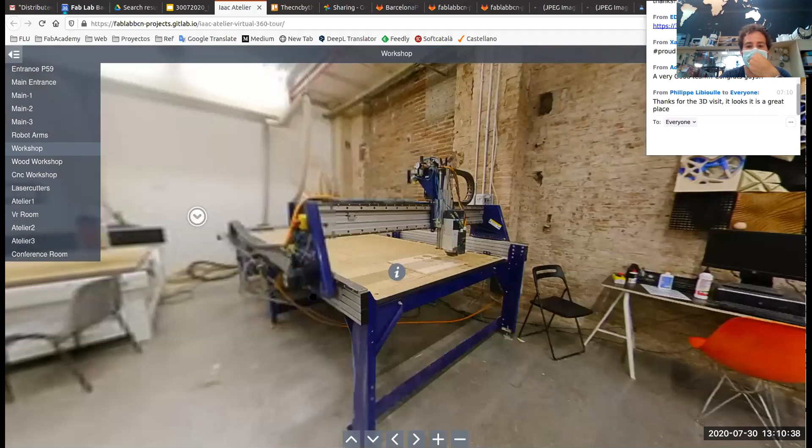Also the multi-networking project: each student could publish data from sensors they have at home through the computer or an ESP board, a Wi-Fi enabled board. So they could share, and across the whole class, they could share all the sensors and activate other people's outputs. For example, let's say Gustavo has a humidity sensor in Brazil, and Adrian is moving a servo based on Gustavo's data. That was the multi-networking idea.

And also to make it a little bit funnier, more like a YouTube channel, we made Making Hyperconnected, where we did a live session on how to do molding and casting with homeware stuff, mostly cooking supplies, since silicone is easy to get normally, but when everything is closed, the only things you have are like cookies, oil, and that kind of thing.

So we found out and tried to make recipes, like non-technology to make technology, to give people the same experience with different materials.

This reflection was very important for us, to understand that we can teach and engage the community around the program with the materials they have at home.

This is why we did this hyper-connected making from home, based on, for example, things you can have in the kitchen, and you can create molding and casting. Of course, you have to skip some digital fabrication parts, but you can at least understand the basic concepts of some of the digital fabrication processes.

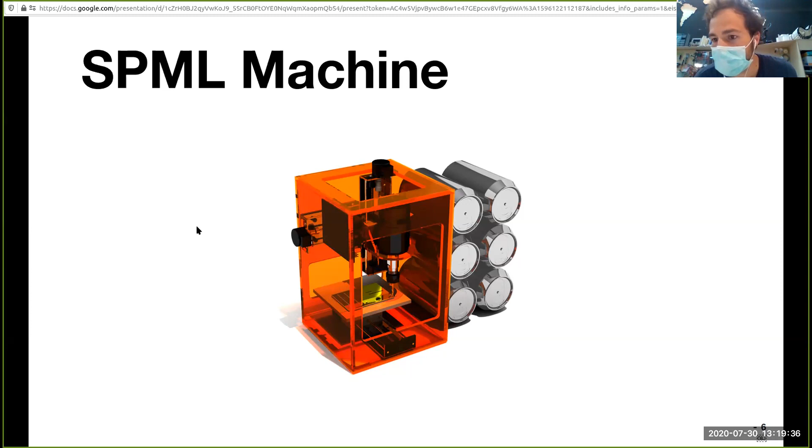So the idea was, as you know, we tell you all of the strategies that we try to follow with the materials that the students had at home and were more available. But there are some digital fabrication processes that are hard to test and learn if you don't have a machine. So the idea was to develop a simple machine, a learning machine more than a fabricating machine, and we have to be clear in that. So the idea is, well, it's a 3-axis machine that can be basically designed for any purpose.

And maybe Edu can explain how this idea came up. So the idea is not actually to challenge big manufacturers, because everybody knows you have really expensive machines, medium cost machines, and cheap low cost machines that are now really affordable and are actually moving this digital fabrication world.

The other point was to try to develop a kind of toolkit for the students that was easy to hack, easy to build, and especially easy to understand all the process involved in building a machine. So actually, we were really confined, and we had what we had stored at home before the confinement. I'm like an old guy, and I store a lot of motors and these kinds of things. I have DVD writers that have really small motors and these kinds of things. Actually, this is one small version that I developed at home just for fun.

It's a cookie engraver. And I said, okay, this is actually an Arduino, a basic thing with a few motors and a simple concept of mechatronics. And actually, how we can distribute this in a way that the students learn and can actually do all the process and modify it themselves.

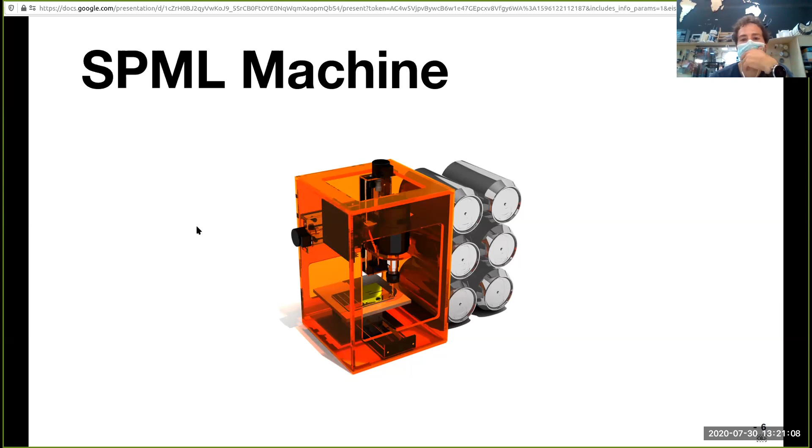Actually, right now we have one student just in front of us who has hacked the machine and interpreted it in his own way to make a different machine. Yeah, we can see him working with a lot of cables.

So we came up with the idea: let's try to make an accessible machine, easy to build, as low cost as possible. Low cost was a big concern because as an institution, we cannot pay like €1,000 for a machine for each student. So keeping the cost accessible was a big deal.

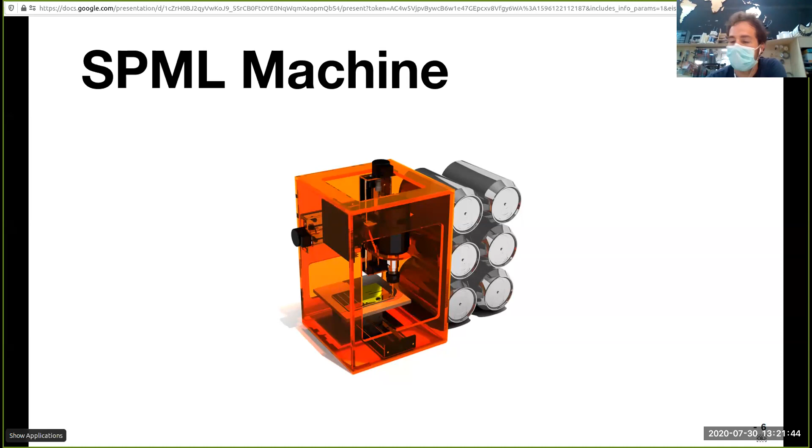And going after the market, looking up retailers, and simplifying the design to the minimum amount of elements, we arrived at this project. Finally, just about 1 week ago, we finally got all the components because of the delays from the confinement. We have tried hacking different motors and everything.

And for this machine, we have fabricated the PCBs here in the lab with another milling machine. We ordered because we need to actually produce like 30 or 40 boards for each student, who will solder at home, simplifying the components also on the PCBs. So they understand all the process.

And we developed, or tried to develop, 2 different versions up to now. There's the 3D printed one, for what happens when you only have access to a 3D printer, a standard size one, like 200x200x200. So actually we figured out, okay, let's say you order the components like the motors, but you cannot fabricate the frame — you can go with a full 3D printed version, simplified enough.

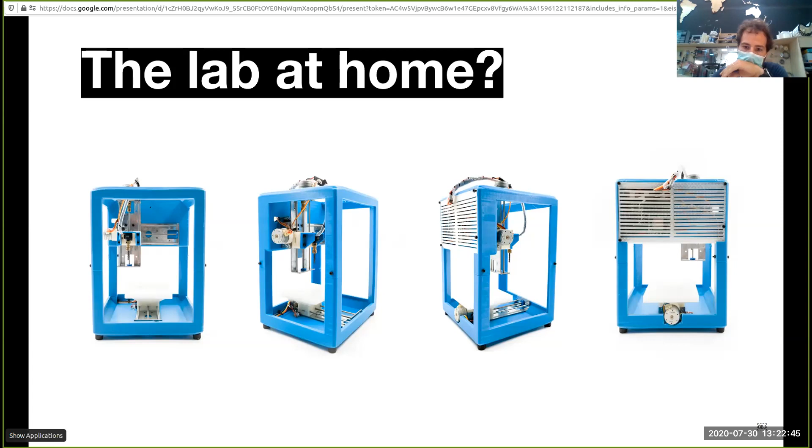And the previous one was the orange one, the laser cut version, where all the components are laser cut. Our idea in the future may be to develop a CNC one, but that's not that feasible for a student and implies more knowledge. So we will try to keep it to laser cut and 3D print for the moment.

So the idea for this machine was to develop a multi-tool machine. That's why we also developed our own custom board that is Wi-Fi compatible. That means you can, at a point, control it also remotely from your own home.

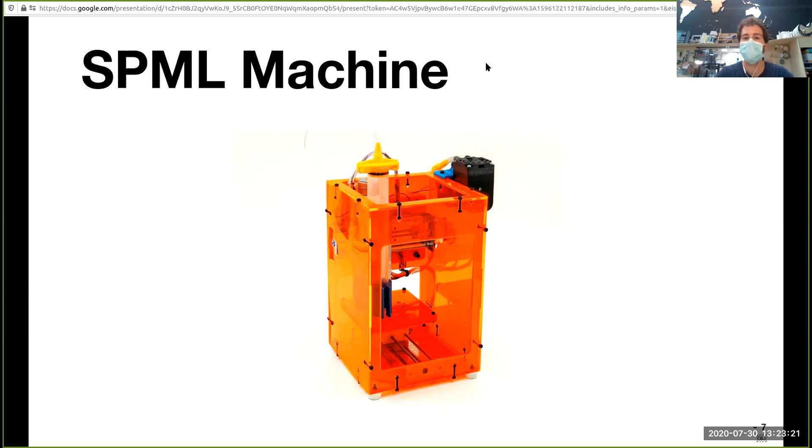Do you want to go to the repository? Do you want to explain the different aspects? Okay, let's go to the repository. We can explain a little bit the idea of the Barduino.

I think it's a very nice concept because, well, for those of you who are a bit familiar with the Fab Lab world, Arduino as it is was not our invention. The first version of, let's say, a Fab Lab version of Arduino was developed here by Luciano, when I was doing Fab Academy.

What we did this year was basically redesign and use a better processor with Bluetooth and Wi-Fi, and well, everything you can imagine now. We upgraded the Barduino to the new times and new microcontrollers. So the idea was, can we have an Arduino version, or a board, that allows us or the students to learn almost everything related to electronics and fabbable, let's say. So this is why we gave that one.

And together with that, there's the Barduino CNC Shield. So basically the Barduino was presented as a fabbable alternative of Arduino and compatible boards. Our main point of developing this was to have Wi-Fi and Bluetooth compatibility, so the students were able to connect to each other through the internet. This helped a lot in development of the tools, and the multi-networking assignment was done all with the Barduinos each student had fabricated at the start of the academy. Diane is showing one right now.

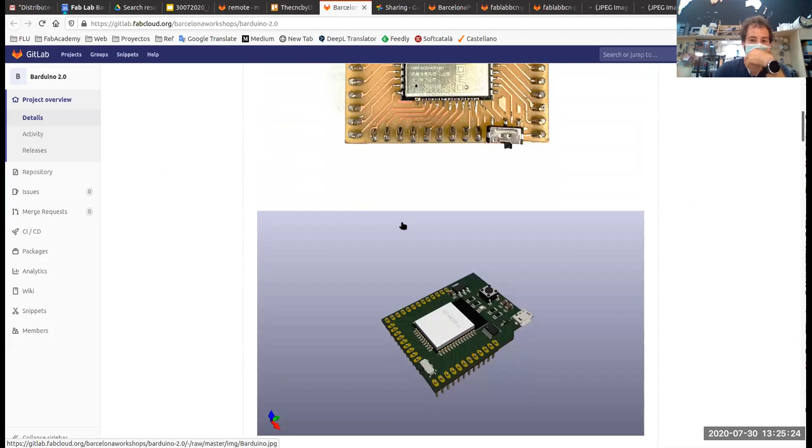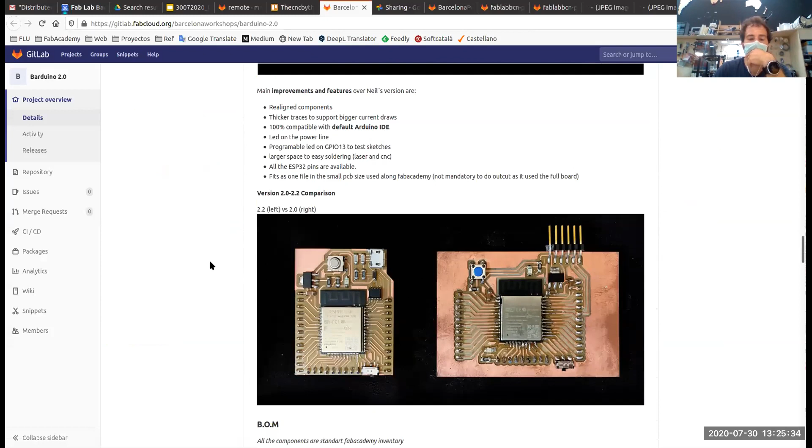So the Barduino CNC Shield is, let's say, a vitamin for the Barduino, allowing it to control external motors, hardware, sensors, etc. We went through different steps of the Barduino, trying to simplify the design as much as possible. So the latest one is breadboard compatible; the initial ones were not. We tried to simplify and still use the least amount of components to make it usable, and we have the pinouts and how to use it, etc.

So the documentation is still ongoing, so maybe you find something. In that case, you can make a pull request and fix it.

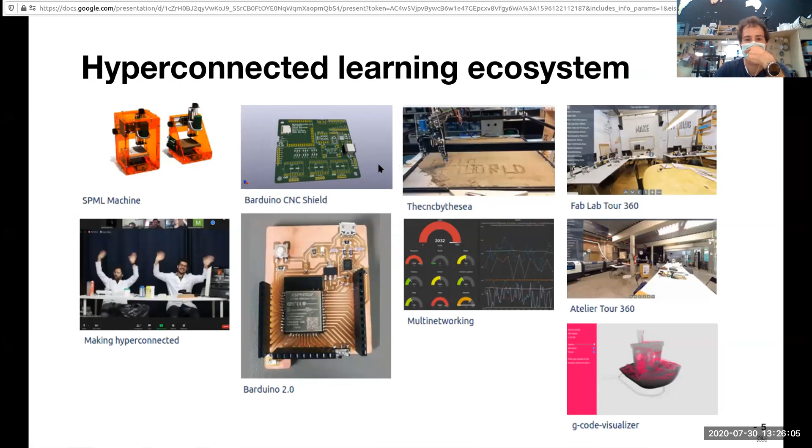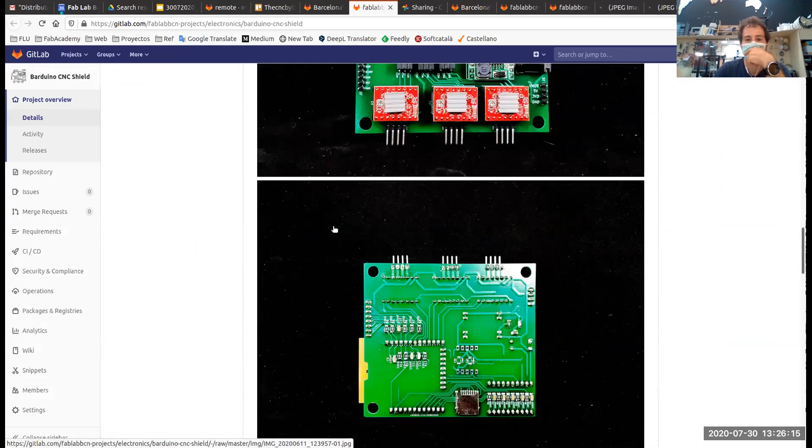So the CNC Shield is basically our own version of ramps, like the controller of a 3D printer or a laser cutter, that is quite compatible. We call it CNC Shield because it was the main purpose for us in this case, and it's the main brain of the SPML machine. So it's a daisy chain of things, where the Barduino CNC Shield we used for the multi-networking, we found out, okay, we can even use it for a machine. So SPML, and also the Kraken, which is the CNC by the sea.

Yeah, let me go. So, yep. Do you want me to run? Okay, let's run the video.

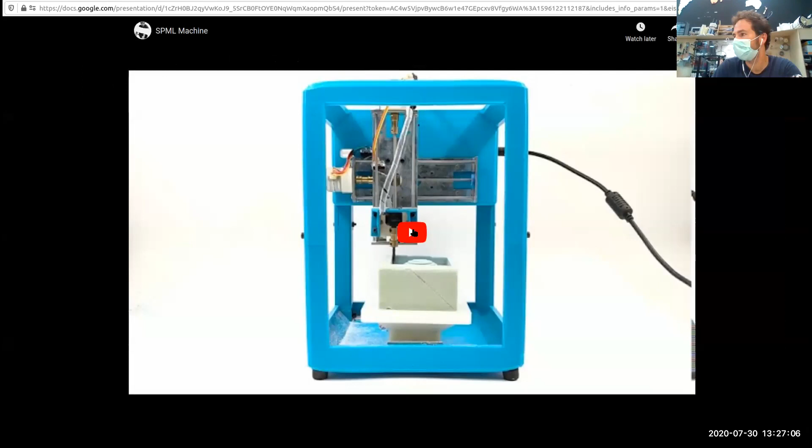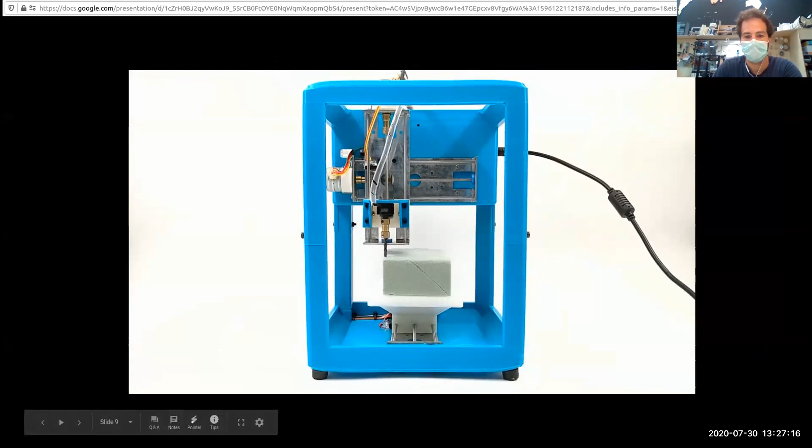So up to now, this is actually from 3 days ago. We finally ran it with a small mini motor and a piece of foam. It's not a professional machine, it's not for high accuracy at all, but it's enough for learning how to actually build your own machines, and to make you conscious that machines could be made by everybody included, you can design your own tools.

Armand, who is here, is trying to design a 5-axis machine, the same way we tried to design this machine. Just next to me, I have the orange one that just finished today. That's actually a bioplastic printer with a syringe and a small air pump to make it portable. Maybe put one together with the other one. Okay, this is too much. Oh, your babies.

So different versions, different styles. And the idea is, we measured today and we think we can run it on batteries to make it even more portable.

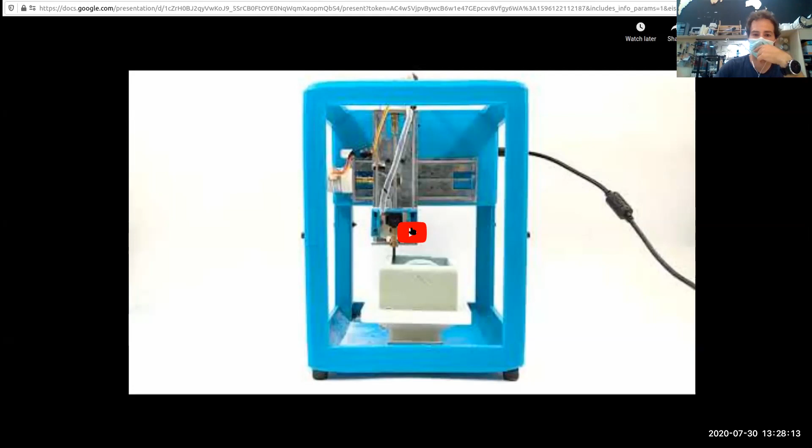Okay, so here you will find the repos and basically all the web pages I was opening while Edu was talking. And also you'll find photos and videos about the process, and us going crazy with any small step we were doing with the machine. So feel free to contribute in the repo, also take pictures of your process, the building one, or replicate it, or bring it to the next level. So please talk to us.

And then the other tool we did, the one we wanted to challenge you to do today, is the CNC by the sea. So we put a nice phrase here: how can we bring the beach into the lab. But the idea was, again, for the CNC, we couldn't have access to a real CNC, let's say.

So we decided how to explain the concepts of CNC without actually going to the lab. And we found out that we have a problem. Okay, yes, we can control a machine remotely, and with this package we're showing you today, you can control 3D printers, CAD, and CNCs. But you should not control a CNC or a laser cutter without anyone supervising it.

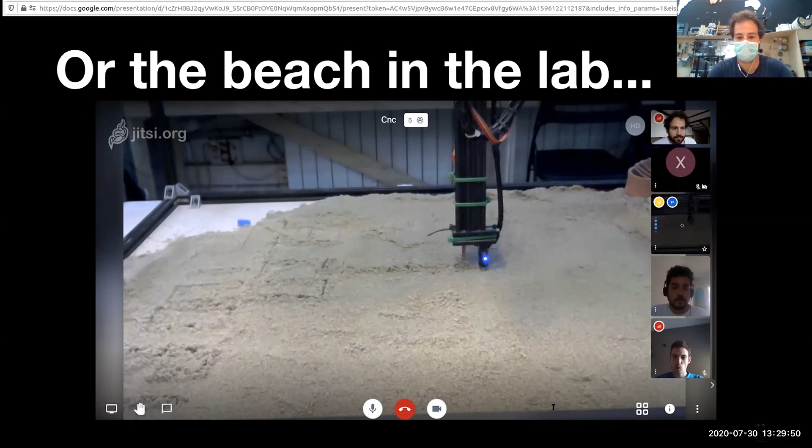So we said, okay, we are in Barcelona, the beach, everybody's missing from home. Okay, let's put sand on top of the machine. And that's where CNC by the sea comes from, because it's a machine that is for drawing on the sand.

Maybe Oscar can explain a little bit more in terms of the group project that we envisioned. Sorry, are we going fast? Okay, we can go in there. So if someone has any questions about what we're talking about, or wants to go more in detail on anything, just tell us. I think while people are trying to operate the machine, we can talk on top, let's say. We wanted to talk less and do more.

But well, anyway, apart from having this experience of generating the code and sending it to the machine, it was also about how we can do something together. Can we create drawings based on incorporating, adding drawings on top of each other? So it was part of the narrative of the exercise.

It was not just lines. It was like, I draw something and then maybe another student can add to this drawing, and we can create a final art piece, if we're talking about sand, with the collaboration of everybody. So we're always trying to incorporate these values of working all together to create more value to the experience. And we put here the links to the repo.

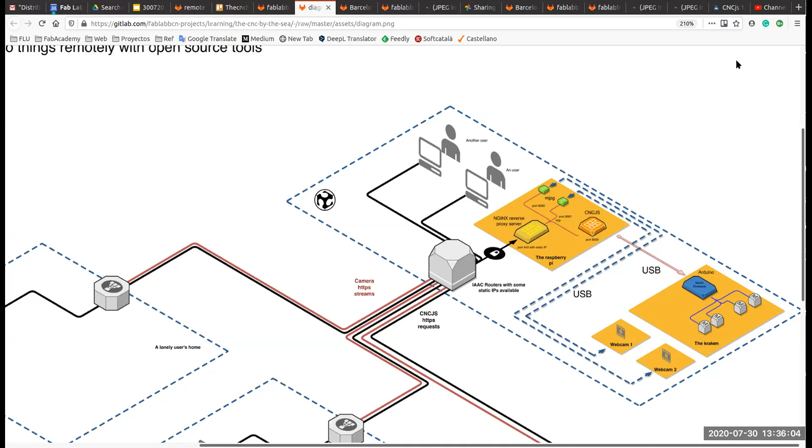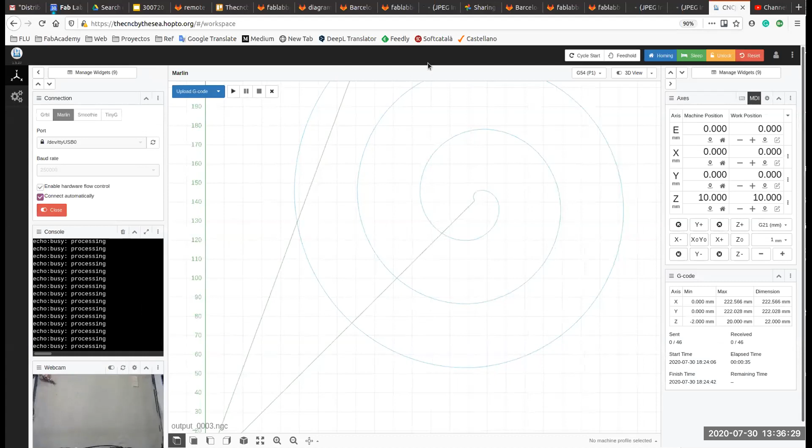Then the students, if you go to the interface, if you want Edu, what they see is something like this. Basically it offers an interface to control the machine as we are used to. You can upload gcode, open and close the serial port, and even see the webcam feed on the left-hand side. This interface is highly configurable with a simple JSON file format, which is also available for this machine to simply import and load so that everything works from the get-go.

It also supports multiple users, but of course only one user can send something at the same time to the machine, because the machine cannot interpret various G-code files at the same time.

As you can see here on the different streams that Edu is putting out, you have a top stream where you can see what you're drawing, and a side stream where you can see the depth of the tool and check if you're actually touching the sand or if there's any problem, or just enjoy watching it in the background.

I don't want to stand here much longer. If you have any questions or think anything can be improved, we welcome you to post issues or comments in the repository or here in the chat, and even interrupt us while we're talking. I'll let Edu explain a little more about the machine itself or interact with it.

Maybe Edu, you can go a little deeper with the electronics that move everything. Okay, so actually the machine, unluckily, was not documented. The only thing that is documented is what we did in our spare time, but it's not a special machine at all.

That's also one of the main reasons not to document it, because it's based on the OpenBuilds system, which is like V-slot aluminum profiles, and we try to use the most standard things on the market. For example, we use this Arduino Mega with a RAMPS board, which is a really standard board for 3D printers. We basically enabled everything in the firmware, just in case.

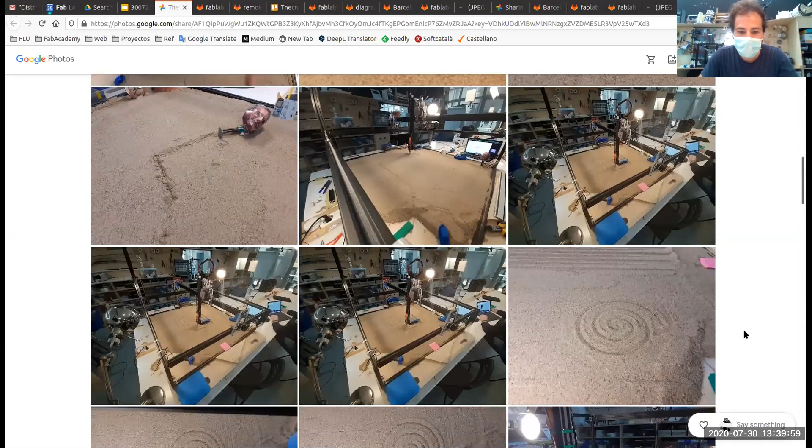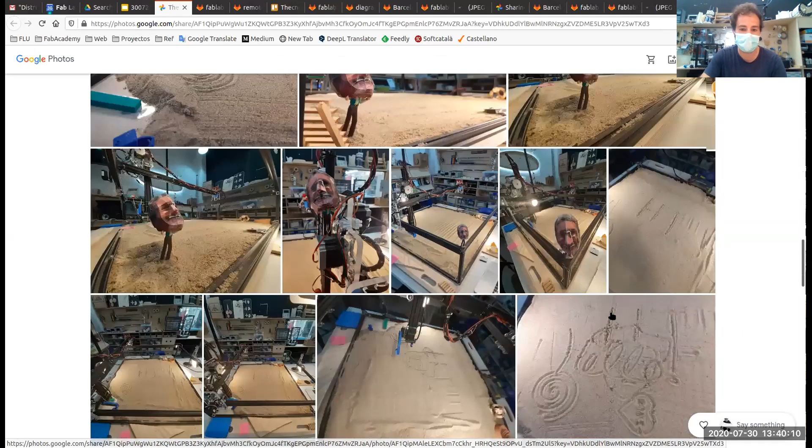So these are images we captured during the process. We were logging into the cameras and taking screenshots, and you can see some of the students' drawings, some of them a little clearer than others.

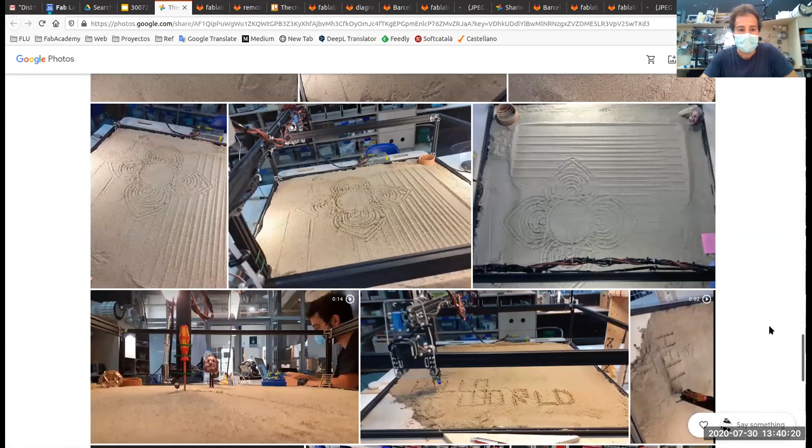Some were more classic, like a 'Hello World'. There were some that were, I don't know, sending us messages.

The students found the process so interesting that even their roommates, who weren't students, started sending drawings and playing with the machine. So we created a nice interaction ecosystem between students, non-students who liked participating in the project, and us.

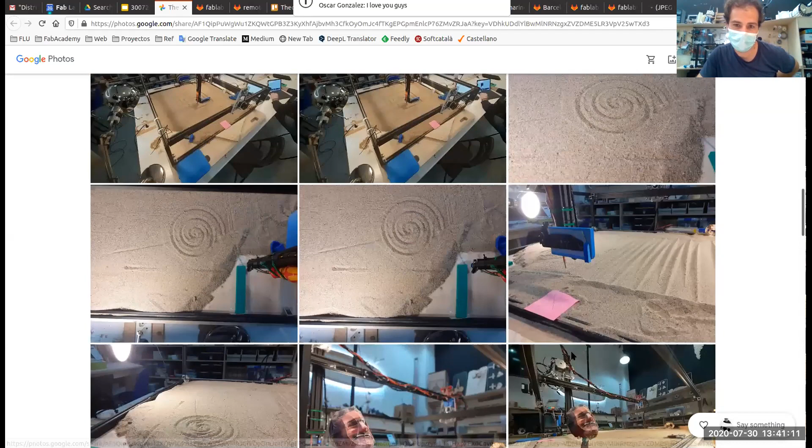Some students left their drawings because we have a system to erase them - we move a servo and put a piece of foam to flatten the surface. Actually, some students didn't want to clean the drawing, so they drew on top of it, designing over other people's drawings. That was quite interesting.

Okay, so I don't know what I'm sharing right now, I'm a little bit lost. Let's jump onto the machine.

I'll share with you the links of the webcam. We have two video streamings - the Pi manages two video streams quite comfortably with just a little fan so it doesn't overheat. We have one view from the top and one view from the side.

The side view is important because it's where you set the zero on the side of the machine, and to draw accurately you need to know the depth you're taking on the drawing. As you can see, it's not technological at all - it's just a flat screwdriver attached with some zip ties.

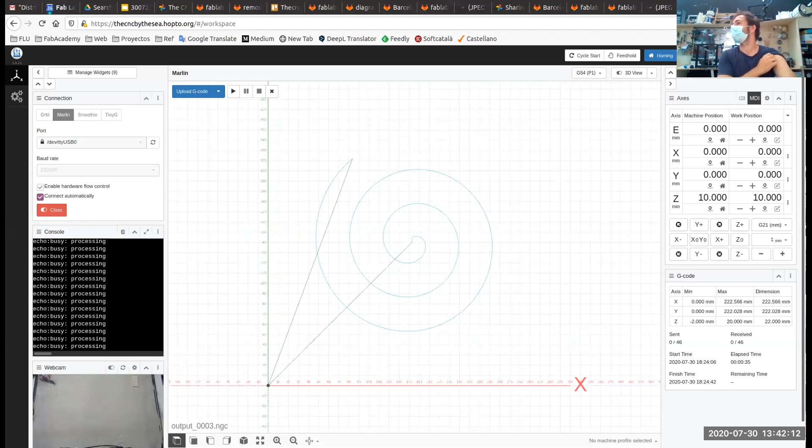Maybe I can show the camera more closely. It's actually in the second link, the 8081 stream - the servo with a piece of foam attached with tape, zip ties, and a screwdriver. High technology digital fabrication, exactly.

Here I'm sharing with you the interface that you can all access. Oh sorry, Oscar sent you the good links with the proper naming.

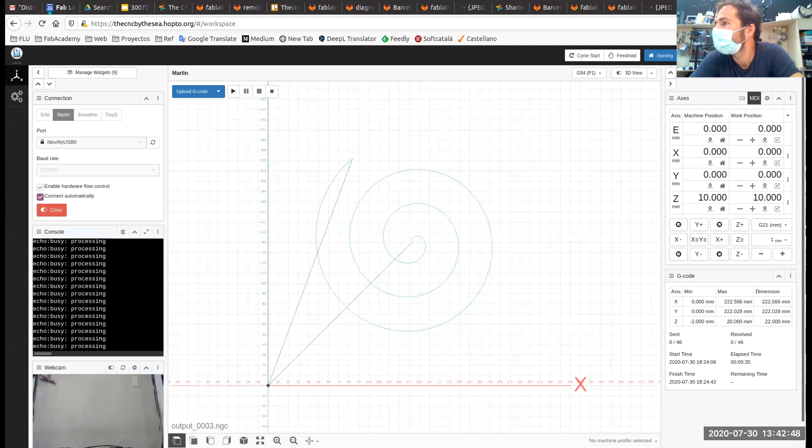So when you try to log in, you will see. Do you want to share your screen? No, share yours, I'll go to your computer.

You'll see it's a top view, but you can also have a three-dimensional view of the workspace, because this CNCjs is designed for milling - not only for remote control but also local control. We just repurposed it for our needs.

We have the connections, like connect to the machine - in this case the Pi is connected to USB 0. You have the console showing what's happening on the machine, so you get live feedback not only via the cameras but also on what's happening in the code.

And the standard menu for controlling machines manually. Basically, you have to upload G-code.

As an interface, we like it a lot because it's not overwhelming. It shows you a lot of things, but it's not too much for the students. Often, someone new to this kind of technology gets in front of a super complex interface like Mach3 or Mach4 and just freezes, afraid to touch anything because everything might explode. So the colors and the kind of interface were things we considered carefully.

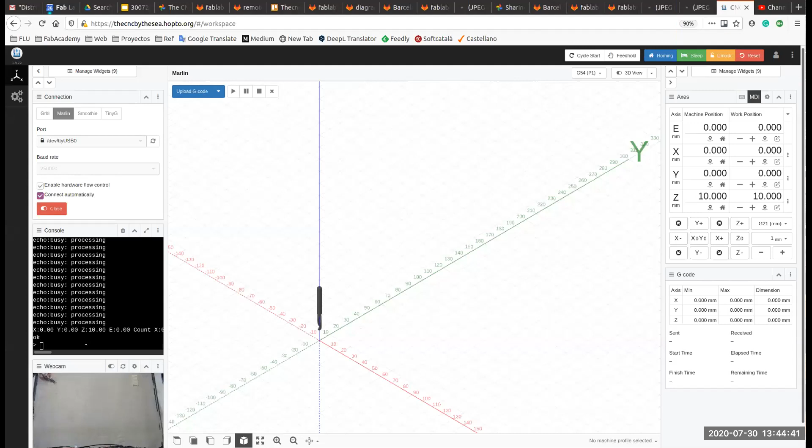They probably also need to know how to load the JSON for the configuration, and the password - I think you saw it, but maybe we can put it in the chat. The password is here in the documentation. Okay, I'll put it in the chat too.

Okay, yeah, we have user and password, so not too many random people from the world can log in easily. So take this amazing opportunity to have the password and connect and play with the machine. Now it's on YouTube today, so be careful what you say.

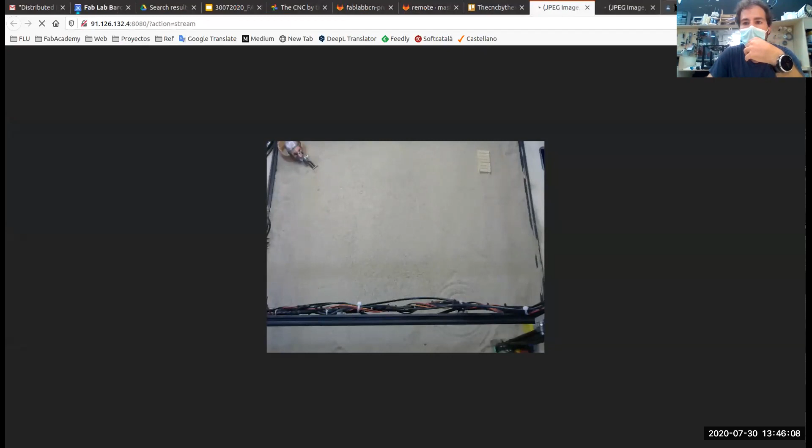Sorry, I'm closing tabs. Giuseppe will send... actually, Giuseppe didn't say anything. Giuseppe is the guy with this cover, you know, it's also one of the guys that are behind this. Actually the blue comes from his hair. Exactly.

You send? Yeah, so the file that you have right now in the chat, you go to settings, workspace. So you import the JSON file that Santi has already uploaded, and that will change how the interface looks for you.

Let me do what I will do. Okay, restore the defaults and just upload a new one. So I need to find the chat, download the file and put it here while they're doing it. Is the... okay, there's too many things. Okay, it was that one.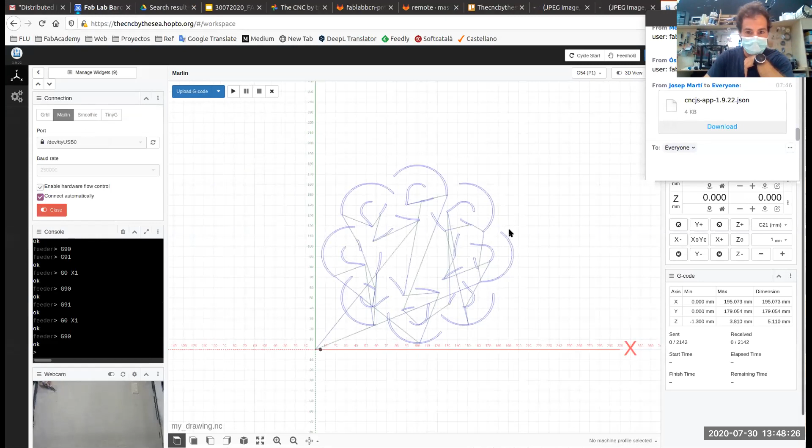So for the ones that don't feel that comfortable, you have to go to port, select dev TTY USB 0, and the baud rate is 250,000, and connect. In that moment, you will have the interface connected.

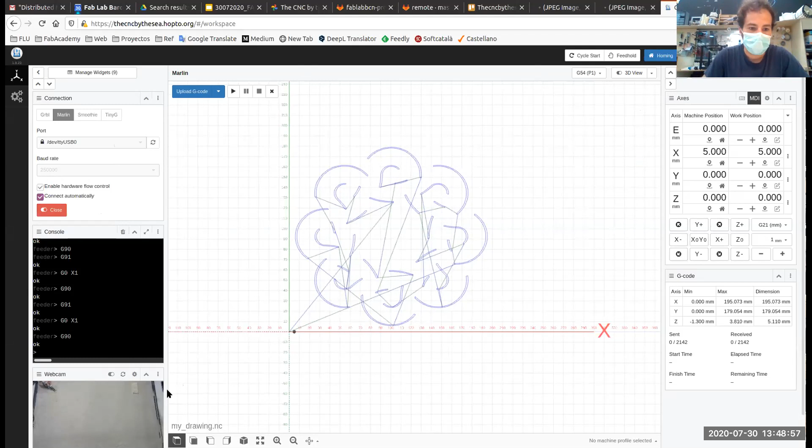Before anybody launches the file, we always recommend to move the Z up so you don't crash on the sand, and do a G28. What I will do is put the other screen here. Yeah, put both screens.

Okay, so now I think we can see everything. You will know that you have access because basically the X and Y buttons to move the machine, you can touch it. So if we move... well, it's going 1 millimeter. Let me go a little bit more.

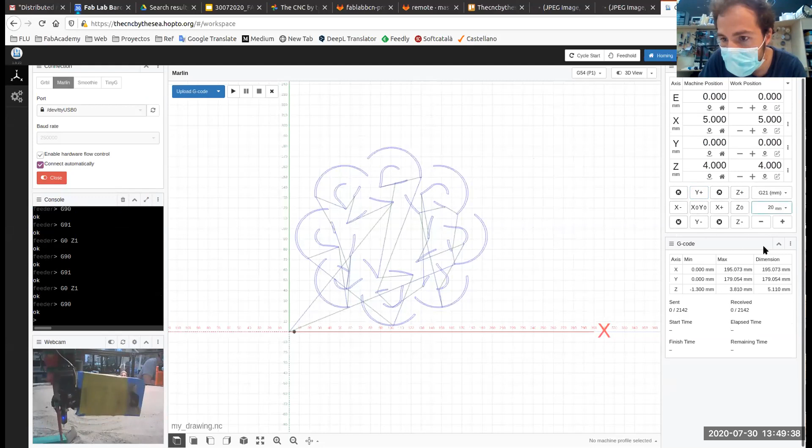Okay, so the Y - it's very difficult to explain this, but the Y, let's say... well, I don't know how to explain which is the Y and the X from your point of view.

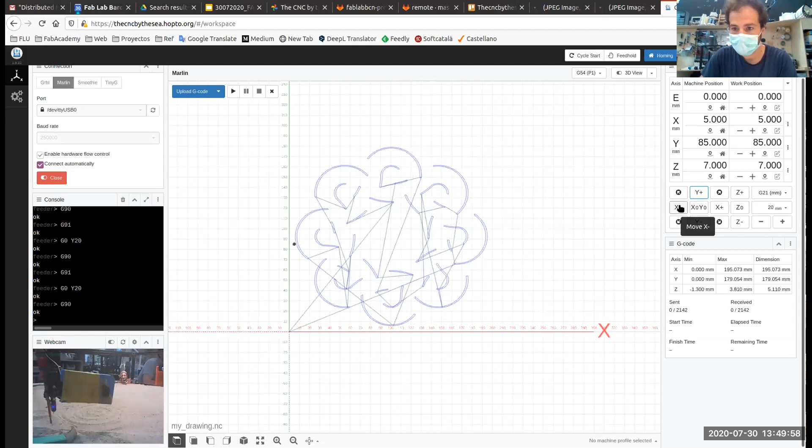But the size, this is something maybe interesting for you: the size of the bed is 700 by 700, but please don't do a drawing of 700 by 700 because we will stay drawing forever. So try to do small drawings.

And then how can you generate the G-code? Here, wherever you feel a little bit more comfortable. I think the fast way, at least for me, is using Inkscape. Inkscape by default, at least the last version, has a tool to generate G-code from a path, and by default you don't have to do anything else.

Then after you generate the G-code, you have to basically change some parameters to adjust the velocity and the Z. It depends on the tool you use for producing the G-code, like a G-code parser. You can also use RhinoCam or Aspire - anything that outputs standard G-code will work.

Also with Inkscape, since it's mainly for 2D drawing, you need to modify it a little bit with a notepad editor like Atom, Sublime, or Brackets, just to be sure that the values are okay.

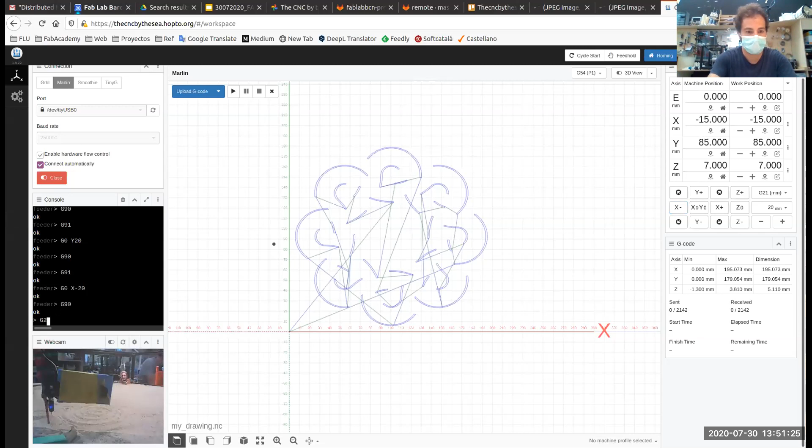So just send a G28, for example. If you go here to the console, you can send commands directly. So if I send G28, you will just go home.

Live, completely, maybe so many people trying to access. Ah, you got kicked out. Yeah, that's weird. Maybe it's YouTube, so many people accessing.

We tested the machine with around 30 students connected live, and when you go inside, you can take control over other people's job. That was funny, we were playing to see who was in control of the machine, and maybe right now we are exceeding the skills and capacity of processing of the Raspberry Pi.

I'm trying to access. Can you access? Is someone able to? Do you have access? If not, let's see. We can. I also got kicked out. Let's see. Bad gateway. Let's see what happened.

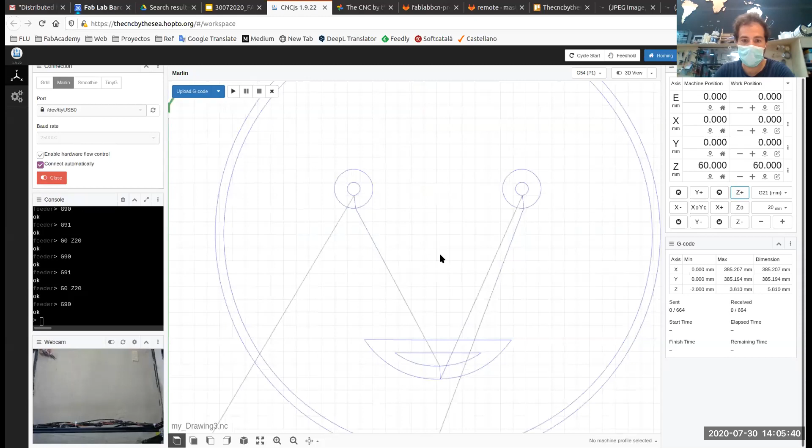In this, oh, I cannot do this thing. So here, actually, whoa, oh, a face. Someone funny. Let's see if someone sent it. No. Oh, someone has done a G28.

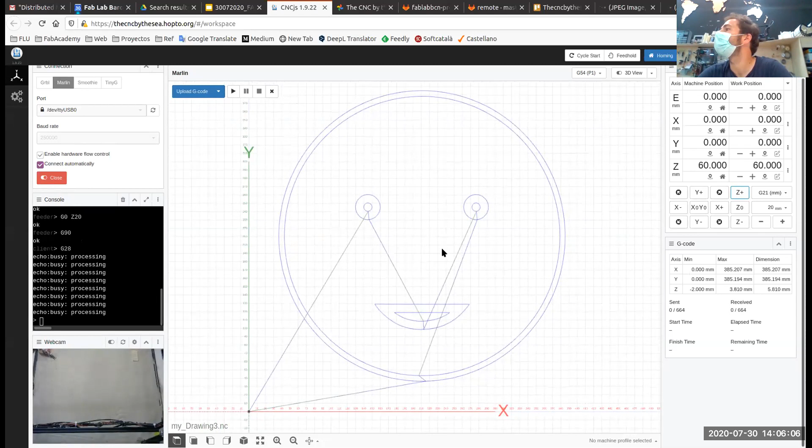It's coming, takes a while. Okay. Did you modify the velocity? No, this is homing, it's going over, it's going to see. Yeah.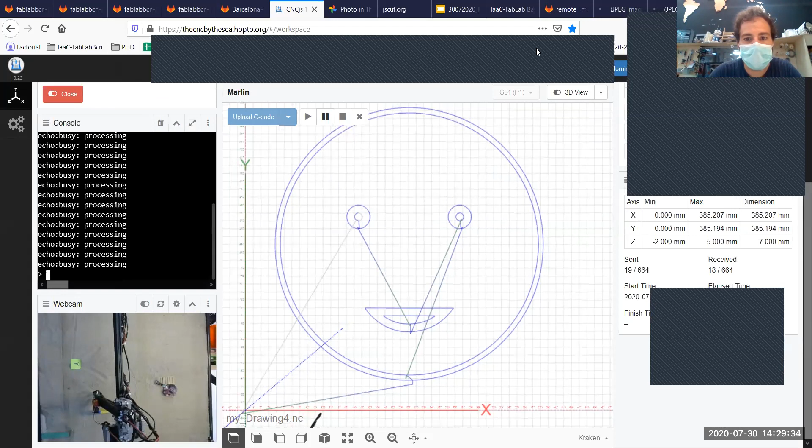Let's go to the other camera. It's not touching the sand. I don't know if it's moving in the air or it's trying to draw, it's like one centimeter or half a centimeter, we can see from the little shadow that shows. Now we are drawing, it's the same drawing.

Yeah, if someone presses like twice. Play. Okay. Is it done, is it done? No, someone connected online.

Okay, Santi wants to share your screen. Oh no, but someone else is drawing. Ooh, dun dun, a heart.

Don't forget to do the 0,0, and I will take out. You need to actually send the G28 command, not G0 X0. Yeah, exactly, because when you connect to the machine, it just resets and forgets where the origin was. As we are using Marlin, a firmware for 3D printers, it doesn't have the variable absolute and relative origins, G54, G55, like other CNCs that remember because they save the home on the EEPROM. The firmware we are using doesn't save it. Actually, it would be nice if we could change that.

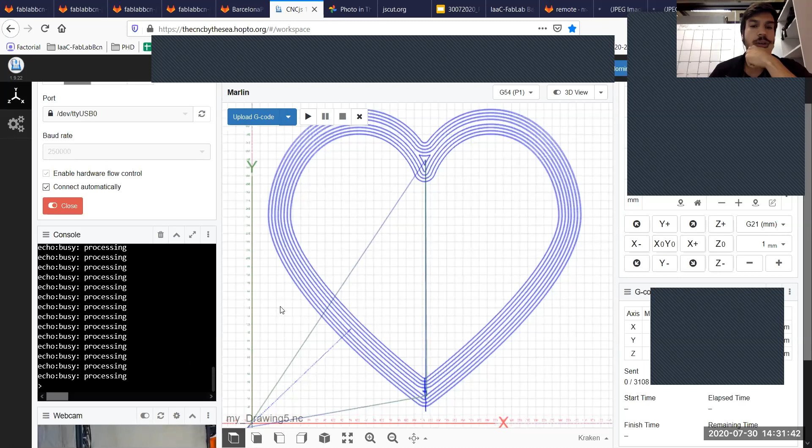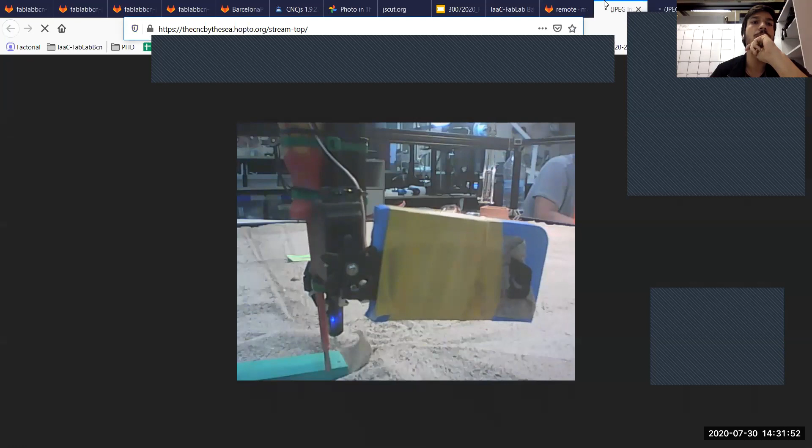Wait, this stream has a little bit of delay, there are so many people. I'm going to close this camera, and you will see it from here, so it's faster.

Cute drawing. Thank you, I'm in love.

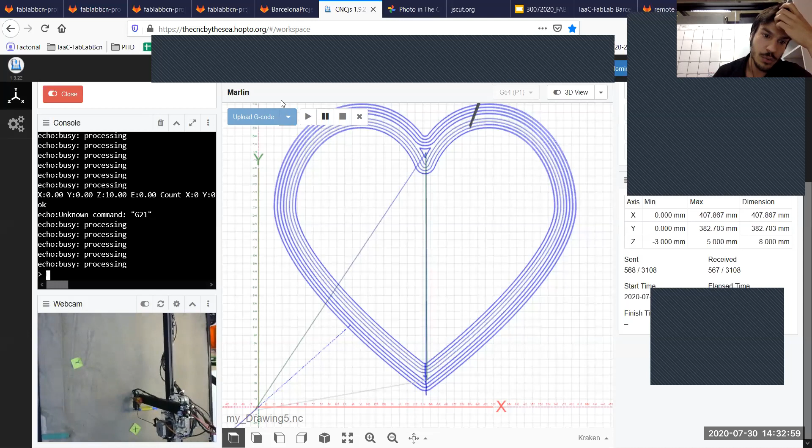It was the quickest thing I could find that was thick enough, because from the top camera it's tricky to be able to see the drawing. So now with this one, I guess we're going to be able to see it.

Oh, this is the side, maybe, what do you think? Maybe we can see better with, let me see the top. It's better now we just switch off the lights. Yeah, now it's better, so now it's better?

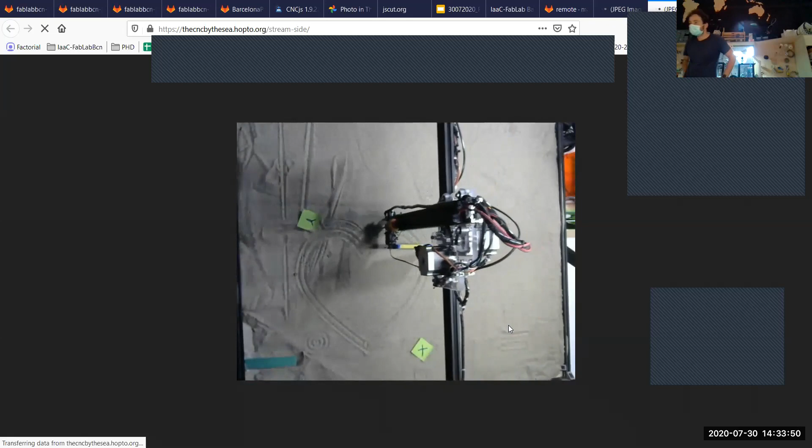Guys, I missed something. How do you clean the sand after the drawings are done to get it flat? For that, the students were making a zigzag pattern. I will do it in Rhino, but you can do it in Inkscape.

You want me to send them? They were making a zigzag pattern just like this, and they were testing the Z, where the probe was, like the servo was testing.

We are not seeing your... Sorry, how can I share again? No, the thing is you have to share the window, not the...

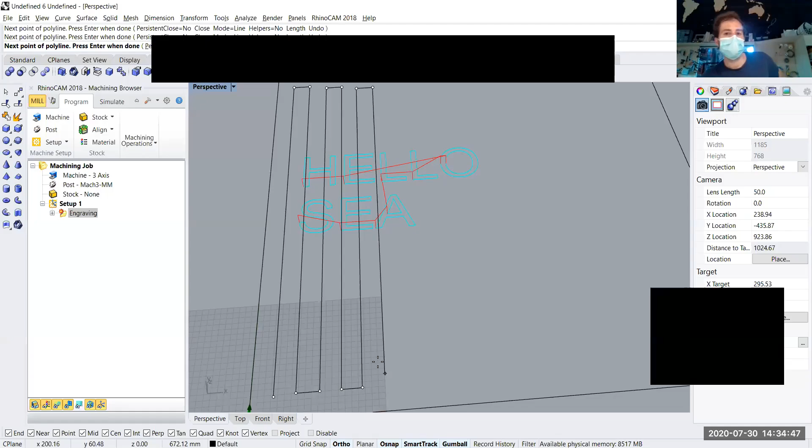So let's say this is the machine. So the students were making a pattern like this, and they were looking at the values for the correct Z with the probe. When this drawing is finished, I can do a small test with you.

Okay, where is the zoom? Share the screen, I will share it again.

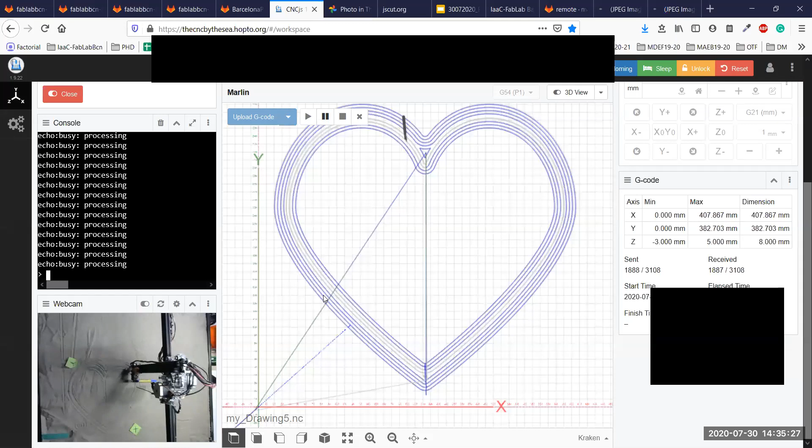This drawing is infinite, he's drawing again and again the same part. No, love is infinite, guys. Did you send it twice? No, it has a lot of lines really close to each other.

And here we also have the problem that the sensor... it's a 4 minute code. Not a big deal.

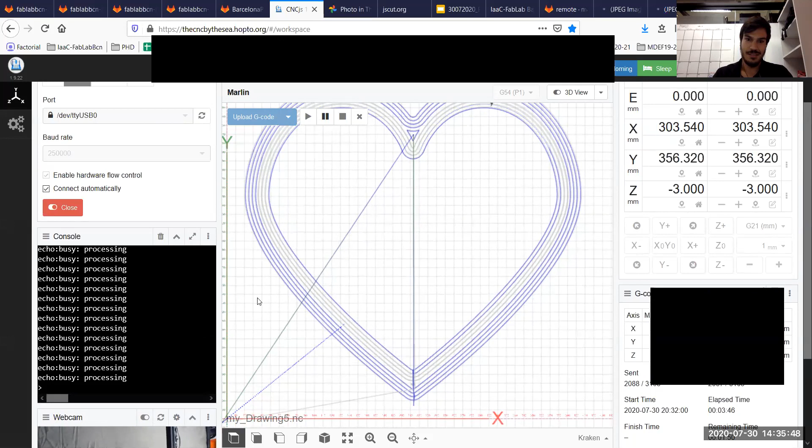Okay, while we are waiting for our drawings to load, what do you think? First impression - did you develop strategies or tools with the same approach in your labs? We would love to hear what approaches you took to this situation that we are all managing right now.

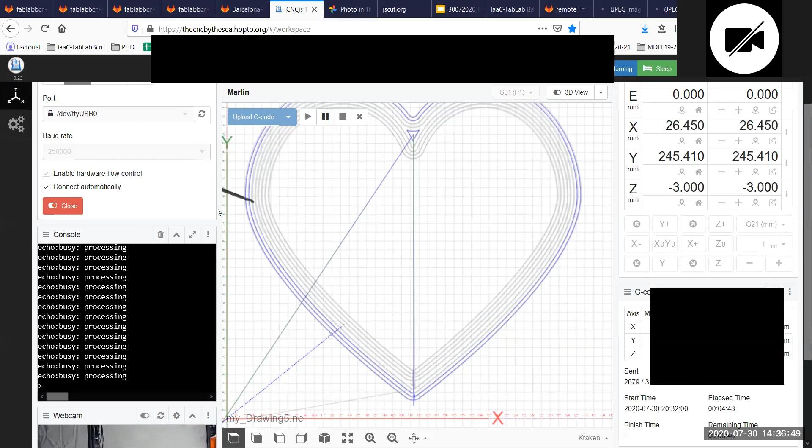No, nobody. Yeah, maybe something, I will turn my video on. Sorry Philippe, I didn't hear you well. I'm just turning my video on.

Okay, it's not directly related to CNC, but more to a laser cutter. When you're working with remote students, I understand you can give them some autonomy by giving them a small 3D printer, a small CNC. But what about the laser cutter? Do you have any advice on that? Should it be better to send them pieces? What should you do, because we cannot send each of them a laser cutter - there's no way to do that. It's way too expensive.

But what should you do? Well, from my point of view, we were thinking we will put a laser and we will engrave in this machine because it's a laser with lower power. But I don't think so.

I think it's better if they stay with the concepts. If we can teach the idea of subtractive manufacturing, and then the idea that there are 2D drawings on how to operate, the workflow, let's say, with the machine - I think that's enough. You can learn a lot and understand the possibilities that you can then do in a laser cutter. So I don't know if we have to replicate all the digital fabrication technologies that we have in the lab at home, because maybe it's too much.

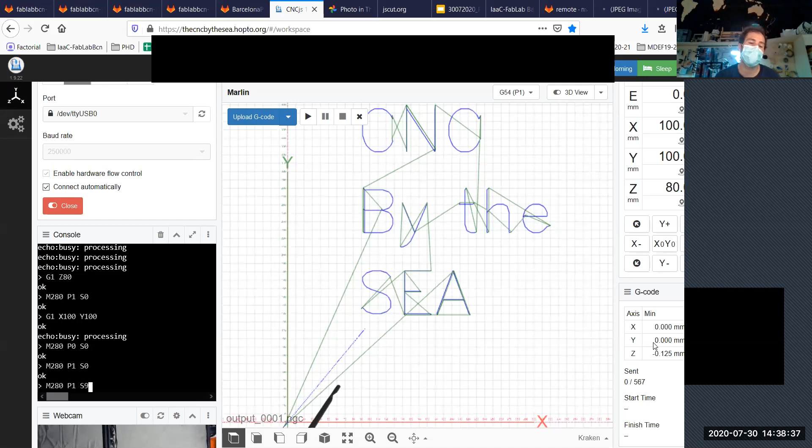From my point of view, at least in the first step, we should stay with the general concepts - rapid prototyping, subtractive manufacturing, additive manufacturing, and how to operate with them, even if it's a CNC, a vinyl cutter, or a laser cutter. So the concepts are there, and this idea of transferring design to work with the machine - these workflows give a huge role to play.

From my point of view, these are learning tools. We are trying to have a hybrid ecosystem, offering the possibility to learn at home, but also taking into consideration that at some point they will have access to the lab. So we are not trying to replace one with the other. At home you can learn certain things, and in the lab other ones, and in another place other things.

Because lasers are quite dangerous - to answer directly, why not use lasers? Even low power lasers at some point present a fire hazard, same as CNC. That's why we went for sand. We have a machine with a small router that's not really dangerous to operate, but there's also the problem that you can CNC a piece of wood, but at some point the wood will finish, and someone needs to go to the lab to replace it, or a piece of foam.

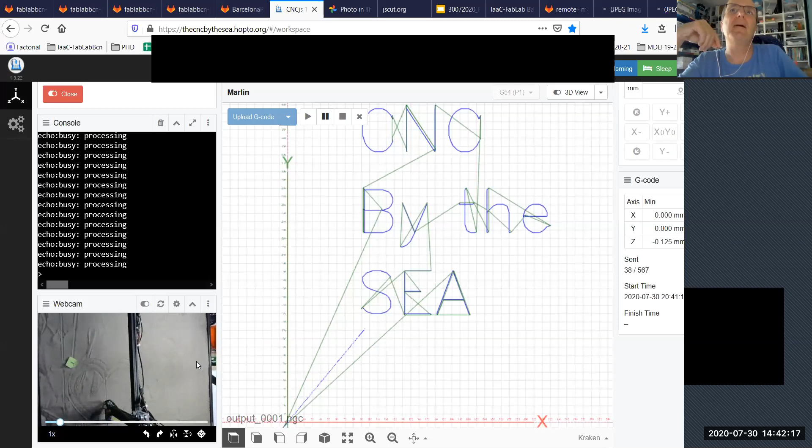For me it's not a problem, but we did it because it was an exceptional situation. Exceptional times need exceptional measures. But in terms of the learning process, this idea of sending something to fabricate and receiving it at home isn't the experience we'd like to offer. There's something else when students face the problems of operating the machine and seeing it there.

We tried everything, and some students used it, while others waited for the lab to reopen to do what they couldn't do remotely. We saw it clearly with molding and casting, where we did a fun class about using DIY stuff to make molds, like taking a piece of Lego and trying to replicate it with chocolate and gelatin. They got excited and tried, and of course failed because gelatin isn't that moldable. When the lab opened, they felt much more comfortable with the process, at least knowing the theoretical workflows, and they went to the machines much faster than those who didn't try.